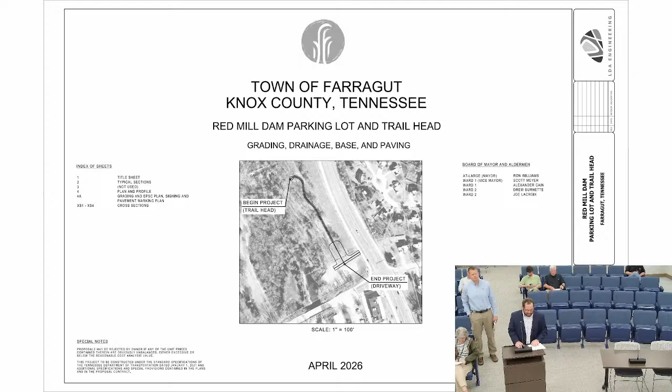The Red Mill Dam is located in the parcel of land at the corner of Concord and Turkey Creek, and was acquired by the town of Farragut. In an effort to showcase this beautiful piece of property, the town's been researching different options for access to the dam area. The project consists of a 10-stall parking lot, pathway leading to a trailhead, and sitting area adjacent to Red Mill Dam. Staff advertised an RFQ in December and selected LDA Engineering to conduct the engineering design and bid selection process for the project.

Access to the paved parking area will be shared through a driveway owned by First Utility District. We've shared plans and are in the approval process to utilize that driveway from First Utility District for our access. And we have Lincoln Fugel with LDA Engineering to do a presentation on the plans.

Hello and good evening. My name is Lincoln Fugel with LDA Engineering. I reside in Maryville, just on the other side of the lake, 1001 Hostetler Road.

So the plans that you can see included in your packet, this is to take advantage of a beautiful piece of woods right down there next to Turkey Creek. As far as access down there, there's an existing drive that belongs to the utility. We entered into a shared agreement, as was stated. We're going to pave their drive in exchange for the use of the access there. All of the parking stalls will be on the separate lot, but the access road itself belongs to the utility.

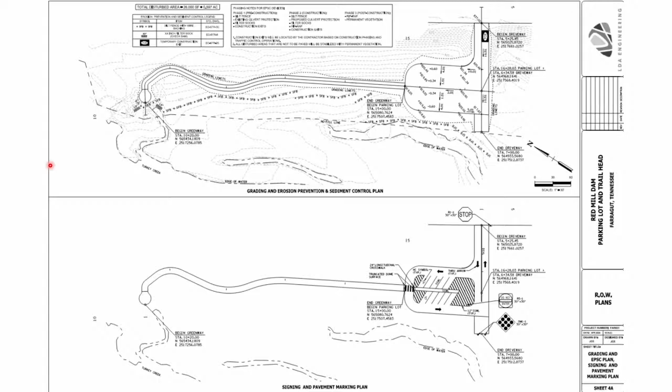The dam is just a little bit upstream of there. This is going to be just on the downhill side, so you'll be able to see where the water comes over the dam in 2 or 3 different places. As far as the grades, you can see in our profiles there, we really aren't having to change the grade very much. I think the steepest grade out there is like 6.5%, so all of it's within ADA compliance.

One of the stated goals of this plan was to keep it simple, and you can see with the cut fill, it's a pretty simple plan. There's no requirement for culverts. We're able to utilize the existing drainage. There aren't going to be a whole lot of changes to the layout. Minimal impact to trees, to kind of preserve the whole point, which is to enjoy the woods down there. But if you have any questions, I'd be happy to answer those.

I'm going to make a motion first: move to approve the design plans for the Red Mill Dam parking lot, access trail, and trailhead. Second. I've got a motion and a second. Are there any citizens signed up? No, sir. Okay, commissioners, anybody have any questions or comments?

I have one. The trail was made out of what now? It's going to be asphalt. Okay, that's right. All right, I don't have any other questions.

If we have a motion and a second, all in favor of the motion, say yes. Opposed, say no. Motion passes unanimously. Thank you. We're excited. Who seconded that?

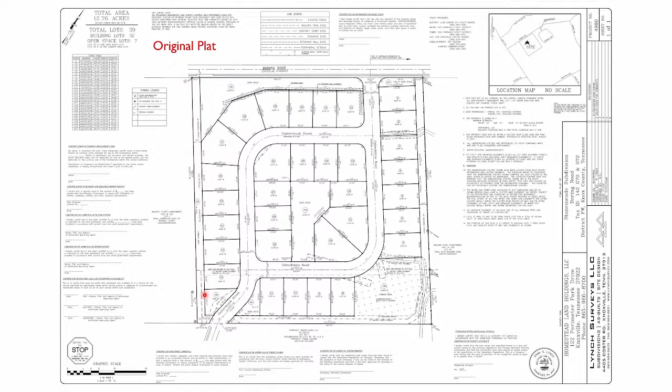Some of the open space here along Boring Road has gotten a little less, and then this center area is a little less open space, with a couple of reductions. If you look at what they're proposing, the center area is a little smaller. They had to increase the lot sizes to meet the lot coverage requirements in R3. I think they were laying it out with the mindset of open space residential, since this applicant deals with that almost all the time, so it was an oversight.

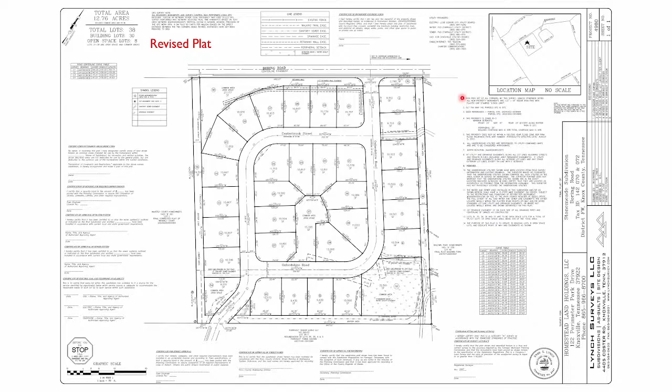This does meet the requirements in our subdivision regulations from the staff's perspective, and we are recommending approval of this final plat amendment, subject to the 5 conditions that were in the packet. Does anybody have any questions? I'll try to answer those.

Do we have any citizens signed up? No, sir. Okay, need a motion? Move to approve subject to the conditions. Second. Okay, we have a motion and a second.

No citizens, so what's the timeline on this project? Thomas Krajewski, 122 Perimeter Park Drive.

Working with the applicant, Homestead Land Holdings. The project is completed, so all of the site work is done. This is a final plat, so it's just a revision of the final plat we just got approved. We're fine with the conditions of this approval, and happy to answer any other questions.

I have a question. How did you settle on who's maintaining the property along the back there by that wall? There's still common area behind the wall, between Boring Road and the wall, and that's maintained by the HOA. As far as the wall itself, it will be maintained by the HOA, and that'll be covered in the declaration of covenants and restrictions for the property.

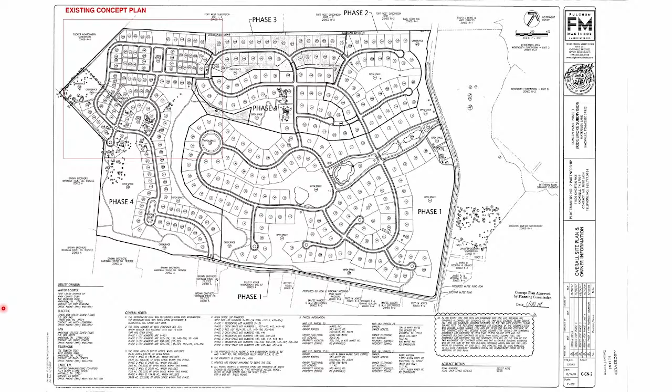This is a request to amend the concept plan originally approved in 2004 when Bridgemore was rezoned to open space residential. That original concept plan has a variety of lot sizes in Bridgemore. One of the particularly unique parts of the concept plan was in the northwest part, the upper left here, where they had some gridded streets, alley-loaded, almost a new urbanist kind of layout concept in that part of the subdivision.

But as they worked their way back to that area and did more detailed analysis of the grade work needed, it's more of a product for a flatter piece of property. To do this was going to require a lot of grading and a lot of retaining walls. So they originally came to the Planning Commission at the June meeting in 2021 to request an amendment to the concept plan.

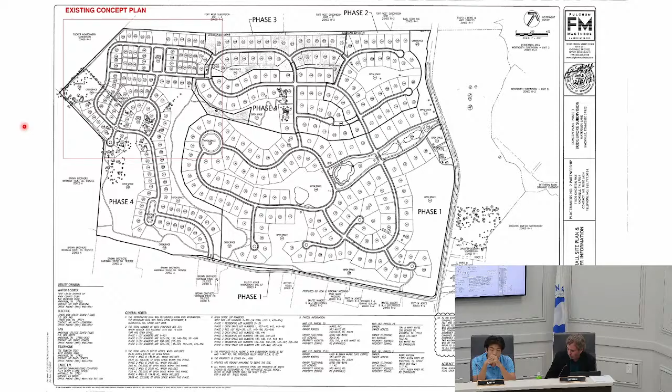Basically to go to what they're showing in the preliminary plat, which is the next agenda item for this part of Bridgemore — a more traditional layout of lots, although they are smaller lot sizes in this portion of Bridgemore than some of the other portions of that subdivision.

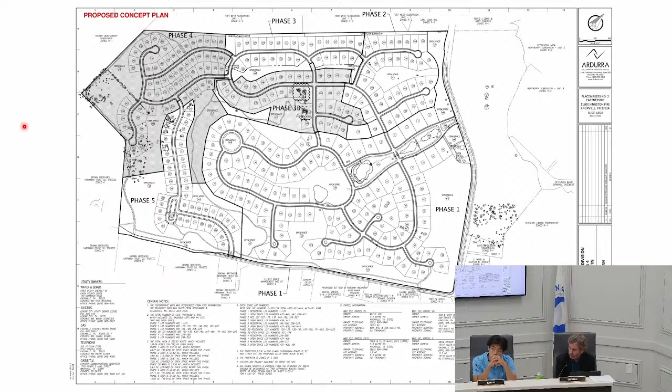One of the things with this revision is that it would require a variance to the cul-de-sac length requirement in our subdivision regulations. So in addition to taking action on the amendment to the concept plan, the Planning Commission would also need to take action on the variance for the cul-de-sac length for the road.

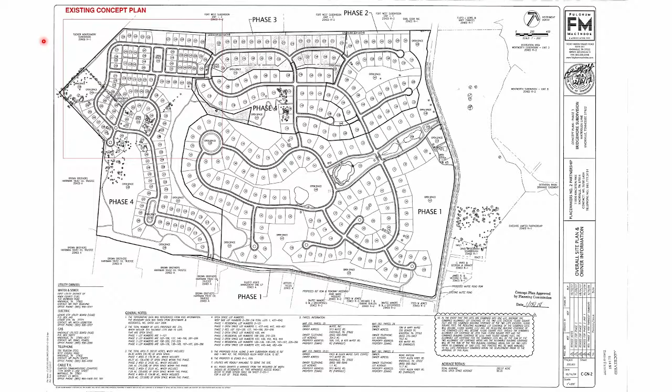This is Road G. It actually starts here and goes down in this location. If you look at the previous layout, it was all gridded streets, which is normally what we would like to see. They still have some of that, but there are a couple of areas where the cul-de-sac was just the most efficient way to do it.

This layout preserves a net of 5 acres of open space more than the original concept plan. The existing concept plan and overall Bridgemore subdivision has 374 lots. This proposed concept plan would have 346 lots, so fewer lots and more open space.

This is ultimately up to the Planning Commission, but you would need to take action on this concept plan amendment and the related variance request. Staff is recommending approval of both items. For the variance, the reason is topography and a layout that works better with the lay of the land in this portion of Bridgemore, creating 5 acres more of open space. If anyone has questions, I'm happy to answer them.

We need a motion for the amendment to the concept plan first. Do we need to do the variance first, Mark? You would need to do the concept plan first because the road is part of the concept plan. Got it, thank you for the clarity.

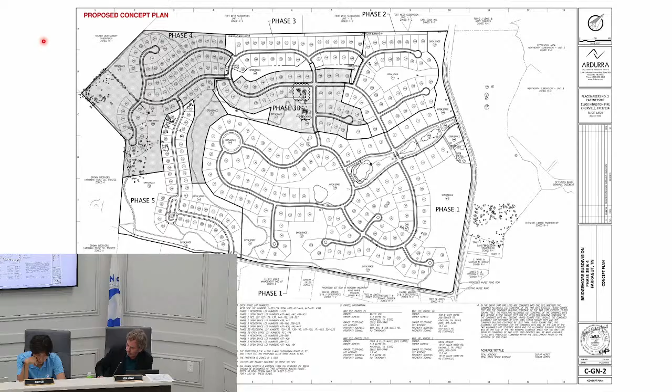As far as the sinkhole matter goes, the only activity they're now proposing that's within the actual sinkhole lip elevation is where the shared use path would be, let me see if I can show it better.

So this is the far northwest portion of Bridgemore. The Montgomery Trail on Tucker Montgomery's property comes in and terminates roughly there. So they would tie into that and come through this part of Bridgemore in the far westernmost. And this is kind of a big depression in here.

The trail system would go through there, and there are provisions in the sinkhole ordinance to allow for that, where it's a critical connection. From staff's perspective, this is critical because it ultimately gets that trail all the way down to Allen Kirby Road and then over to McFee. They also have some stormwater discharge that's been authorized by TDEC in this area.

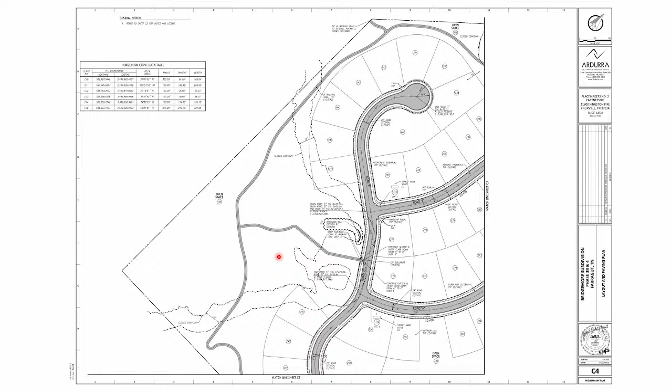So in terms of the sinkhole, one of the subject-tos is just to provide documentation or updated information to demonstrate that what they're doing in this part of the subdivision with the sinkhole lip elevation is compliant with section 107-68 of the sinkhole ordinance. That talks about the parameters that allow you to do things within the sinkhole lip elevation.

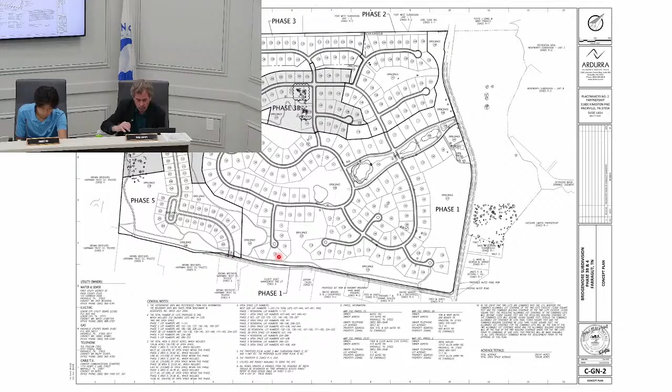The other thing, and probably the bigger issue at this point with these phases, is the matter of the public street and getting a connection back to Allen Kirby Road. Going back to the proposed concept plan, the shaded areas are phases 3B and 4, but this street section here would be in the last phase, phase 5.

Staff is recommending either this needs to be studied and approved by the Planning Commission and added to this particular scope of work, or a letter of credit be posted to ensure this public street is completed along with the improvements on the north side of Allen Kirby Road.

The existing asphalt on Allen Kirby Road would be unchanged on the south side. Everything is going to the north, and there's right-of-way that's been platted in previous phases of Bridgemore for Allen Kirby Road improvements. So one of the things that is of concern...

There's 102 lots in phases 3B and 4, but there would only be about 40 to 45 left in Phase 5. Since this development is getting further and further away from its only access at McFee Road, the fire marshal has relied on compliance with the concept plan, understanding there will ultimately someday be a connection to Allen Kirby Road, allowing the houses to not be sprinklered in this subdivision—otherwise they all would have had to be sprinklered.

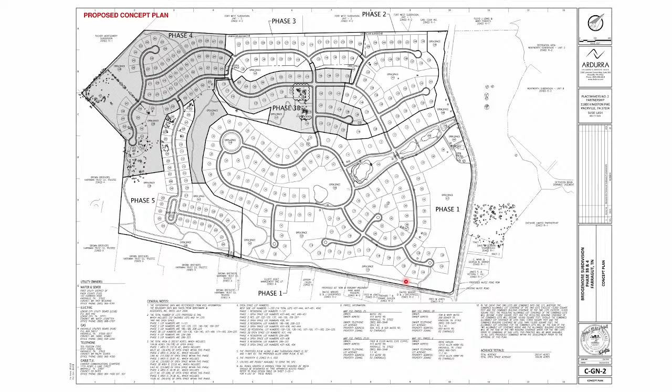So those are some of the things that, from staff's perspective, this public street connection and the improvements to Allen Kirby Road need to be tied to these phases—whether they design and build it all at once, build it out, or post a letter of credit to cover the public street shown in Phase 5 and the improvements to Allen Kirby Road. That's really up to the Planning Commission.

Staff would say that for the letter of credit, the town engineer would need to look at their estimates and come up with a dollar amount to cover all of this. Staff would also recommend that the letter of credit language establish some timeline for when these remaining public street sections and improvements to Allen Kirby Road would be completed.

Our recommendation in the packet is that would be 3 years after the grading permit is issued for phases 3B and 4. Because this has been going on since 2004, and we feel it's fairly urgent at this stage, as there are several hundred houses we're looking at, with only one access point at this time. We've worked with the applicant in the past to not require this improvement until they got further west into the subdivision, and we feel they're at that point now where it needs to be taken care of.

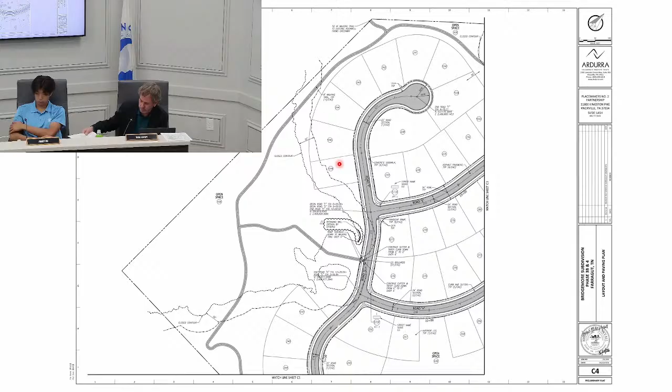It looks like they have enough space for that, but there was a conflict with what was shown on the building envelopes on some of the sheets, because we would not want to create lots that require a variance from the Board of Zoning Appeals. That would not be something the Planning Commission should do. So they either need to modify their building envelopes or modify the lot so there's enough buildable area outside the 50-foot setback. That's what number 6 is about.

More information on the 20-foot temporary fire apparatus road. There's an old driveway off of Allen Kirby Road that will temporarily be a 20-foot fire apparatus road, and eventually it'll become a walking trail tying the subdivision down to Allen Kirby Road. So just having a design on that.

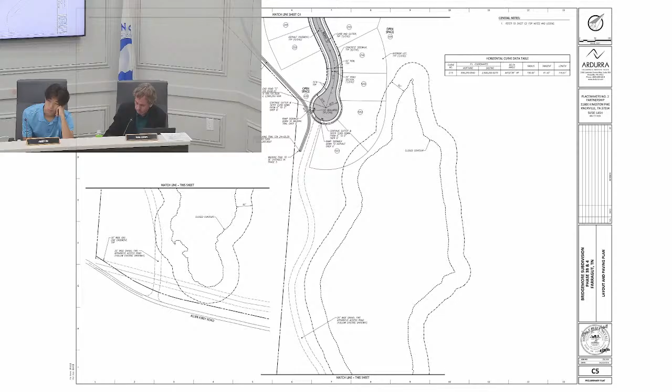There was a comment about moving a storm sewer head wall back a little bit, and a comment about limits of disturbance within the sinkhole lip elevation, demonstrating compliance with Section 107-68 of the sinkhole ordinance. With those conditions, the staff is recommending approval of this preliminary plat.

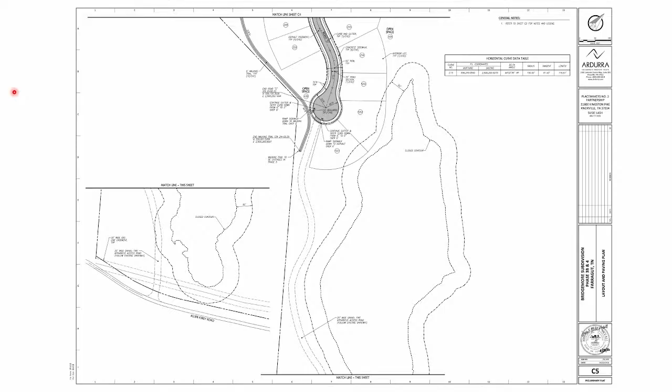I move to approve with the 9 subject-tos. I'll second that. Okay, we have a motion and a second.

Any citizens signed up to speak? No, sir. Okay, do we have a representative here? Carter McCall, 2160 Lakeside Center Way, Knoxville, Tennessee, 37922.

Before we open up for questions, do you have anything else to add to what Marcus said? Yeah, a couple things I'll address: I think the owner would prefer the letter of credit option regarding the public road connection and improvements, because the design and construction of Phase 5 is just not where they are in the project yet. They have not engaged anyone to look at that at this point. They're trying to move forward with these 2 phases and then start looking at the final phase.

Tied to that would be the temporary access. Jay Willis, the owner's representative, and I met back in 2021 while going through the planning commission process. We walked that temporary road layout with the fire marshal and reviewed it in the field to make sure he was okay with it. There will be some modifications necessary to bring it up to fire code standards, which the owner's willing to do and work with them on.

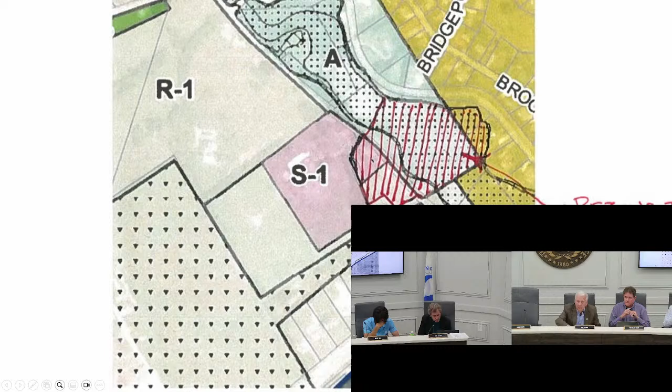Oh sorry, to rezone, there you go, so that shows it a little bit better. This part here on the south, this little L-shaped area, is already zoned R1, but they're wanting to rezone the whole parcel to R1. It is consistent, R1 is consistent with the future land use map, it's open space cluster residential, which is the same density as R1. So it is consistent with that.

If rezoned, this would support the ability to subdivide the property into three lots, which is ultimately what they would like to do. We walked the property last week. Other than the overhead utility lines running through there that mess with your views, it's a really nice piece of property with plenty of room for the three lots. So that's kind of the intent of the rezoning.

From a staff's perspective, the rezoning makes sense. R1 is already to the south of this parcel, and part of this parcel is already R1. Again, it is consistent with the future land use map.

If anybody has questions, we are going to coordinate if they ultimately do re-subdivide. The applicant, Benny Mormon, the staff, and the designers for the Virtue Road improvements have all met together and shared plans. We're going to coordinate with our design team on the access for these lots. We'll have to have a joint access for at least two of them, and then the boardwalk and the crossing of Virtue Road to the asphalt trail. Just trying to make sure we're thinking ahead and coordinating with the property owner and the town so there's not conflicts in the future.

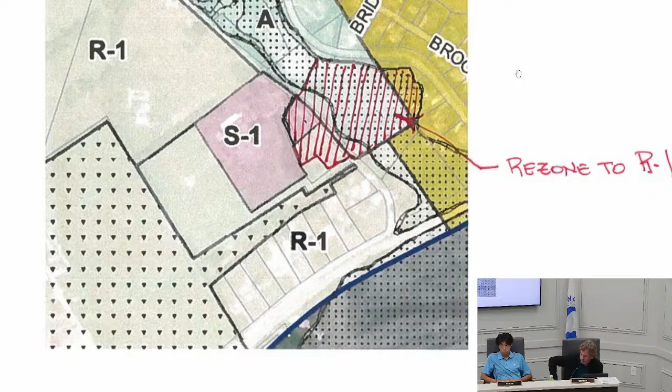So again, this is just discussion items. If y'all have any questions, I know the applicant's here, if you have any questions of him. But that's kind of an overview of what this is about.

Is anybody signed up? No, sir. Okay, so we have no residents. Applicant, want to come up and add anything before we discuss it?

Once again, Benny Mormon, 10308 Hardin Valley Road. I have nothing to add. Mark did a great presentation. You see our plans for dividing the property, and we fully intend to work with the town on this project.

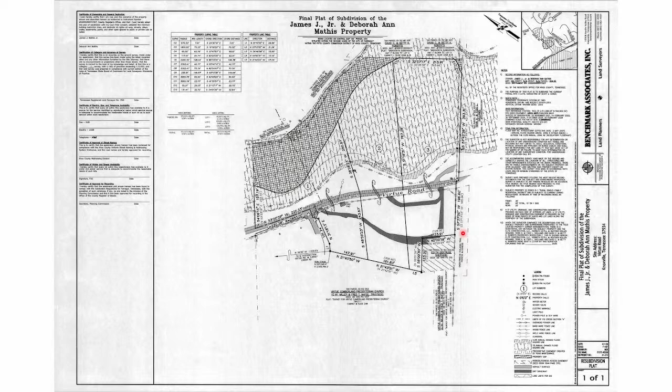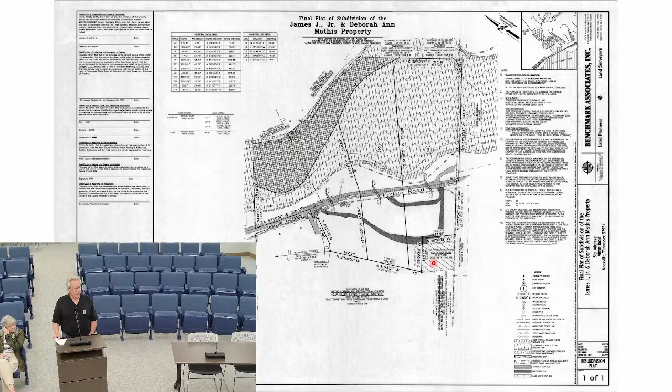I have a few points, and I know you guys have talked about it, but I want to bring it to the attention of the rest of the planning commission. That one lot up there, the square parcel in the south corner, they have an easement for access, and I know you're aware of that, crossing that long rectangular tract. Matter of fact, the instrument of record for the square tract, which is a fee simple parcel, is recorded in deed book 1644-373. The immediate document after that is the access easement, and it crosses that rectangular portion. You guys are aware of that.

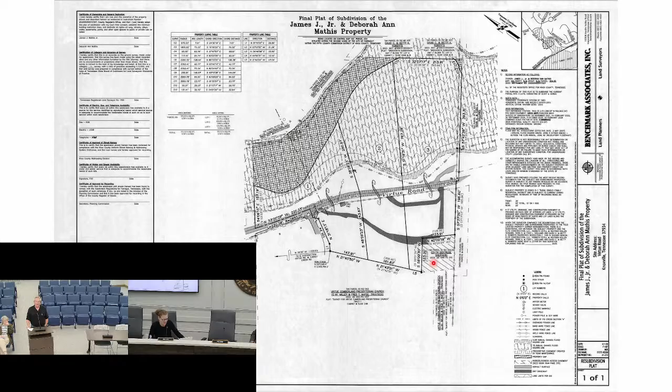I just want to make sure we stay on top of that, because the last thing we need to do is give them no place to get to their property. Yes, ma'am, I agree. We actually had hoped to purchase that property, or my client had, but getting connected with those people has been very difficult, which would make everything easy.

The whole rest of this, I don't understand why half a parcel is S1, it doesn't quite make sense to me how that came about, and getting across the street, R1. The other thing you guys are talking about is making sure that as Virtue Road is improved and we have the boardwalk, property owners still have access to their property across from it. I imagine that's part of the discussion, making sure that when we do this boardwalk they still have a point of access. But I like this, it cleans it up and gives us three nice viable options for a rural type feel in that area. So yeah, I don't have any issues with this.

Anybody else? I like the idea myself, so there's no vote, no motion, it's just - you got enough information, Mark? Are you satisfied?

Yeah, I'll have it on for an ordinance next month for formal recommendation to the board. What will be the date of that meeting, do you know? I think it's June 18th, the third Thursday. Okay, yes, June 18th. And then it goes to two readings at the board, yeah.